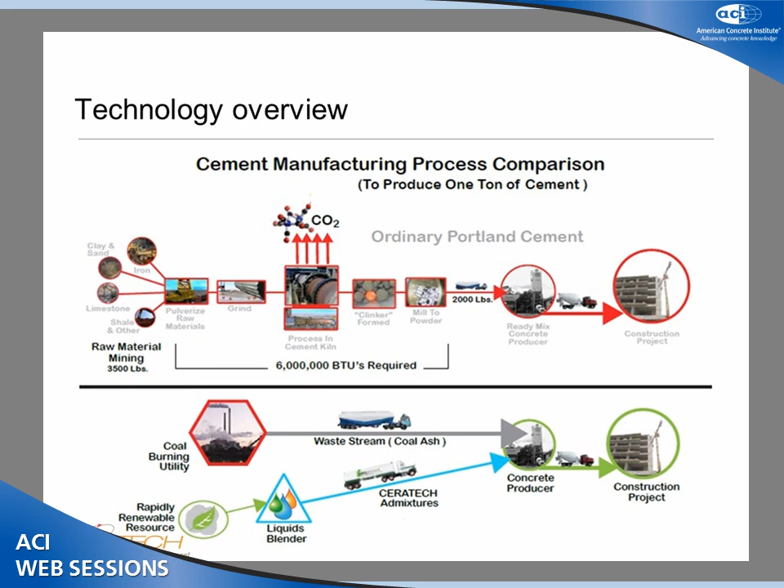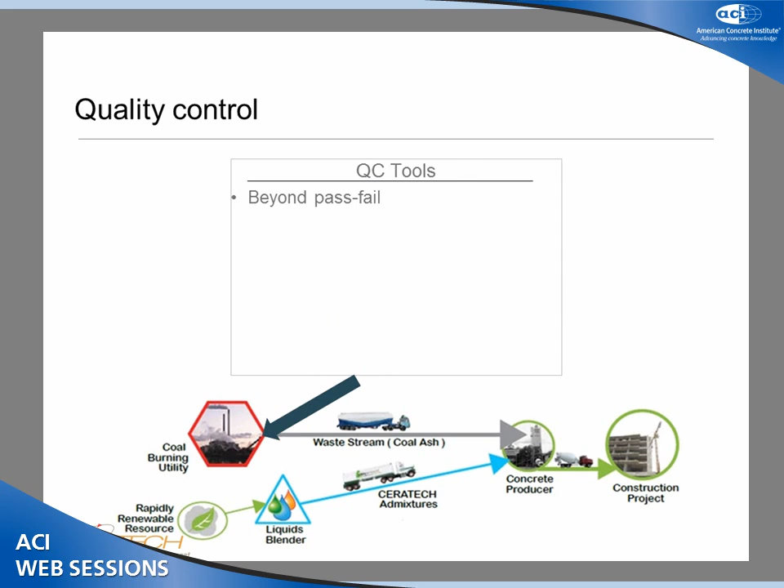So we were looking for quality control tools that we could actually set up at the power plant or before basically the ready-mix plant. So we need something, again, beyond pass or fail. We know that Class C works and Class F will not work for us. We want to be able to deliver concrete with consistent set time and strength.

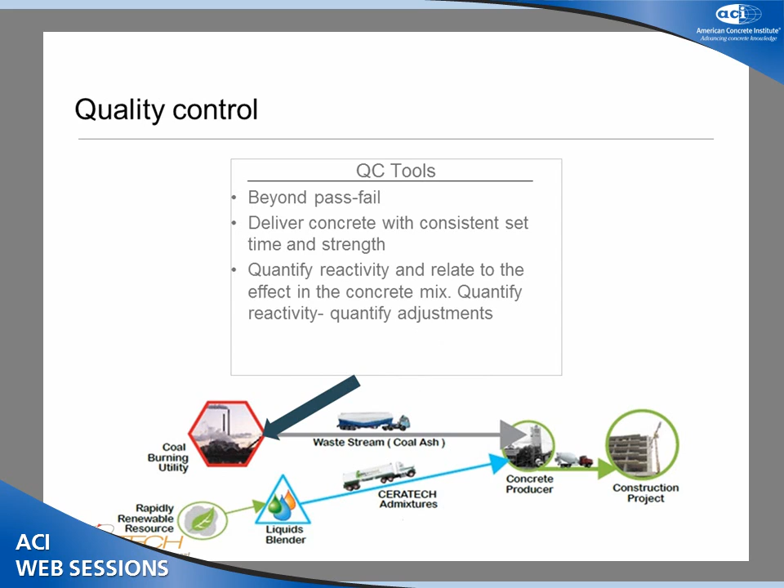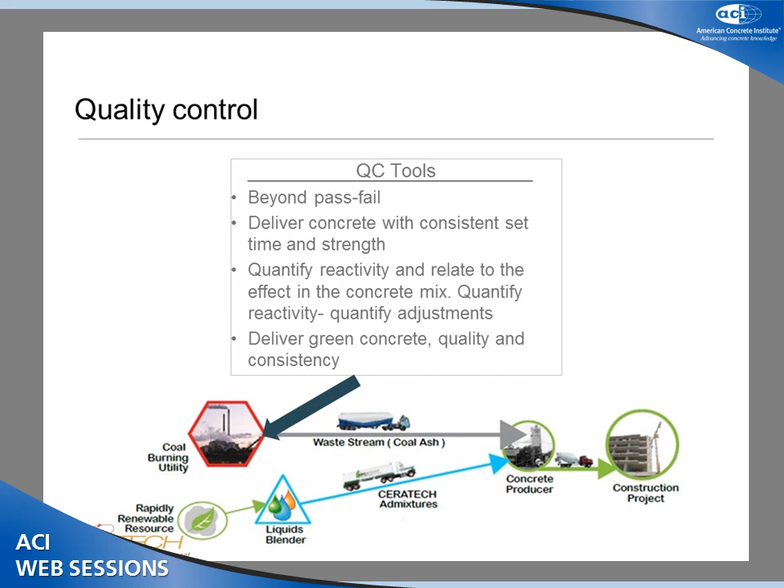And by quantifying the reactivity, we can quantify changes also in the mix. So if we know how much the reactivity changed, we can quantify the amount of change that we have to make in our activators. So we could be able to deliver not only a unique product, but we can deliver quality and we can deliver consistency.

So I think we all know what fly ash is, but I'll say it anyways. Main components are silica, calcium oxide, alumina, iron oxide. Class C fly ash also has pretty high contents of magnesium oxide. Mostly amorphous, higher amorphous content than Class F fly ash. Crystalline components, most people would agree that they can be considered relatively inert. Mean particle size on average, we have around 20 microns. And most people also would agree that the reactivity depends on the glassy phase content and the glassy phase composition.

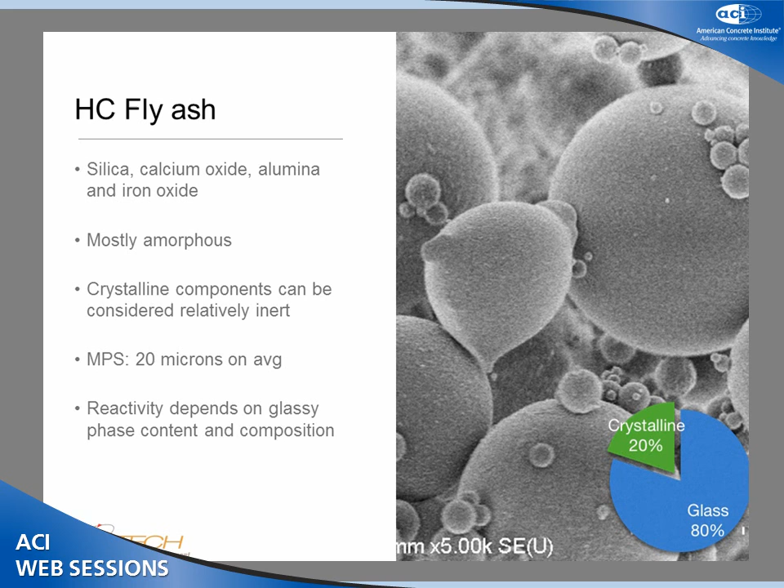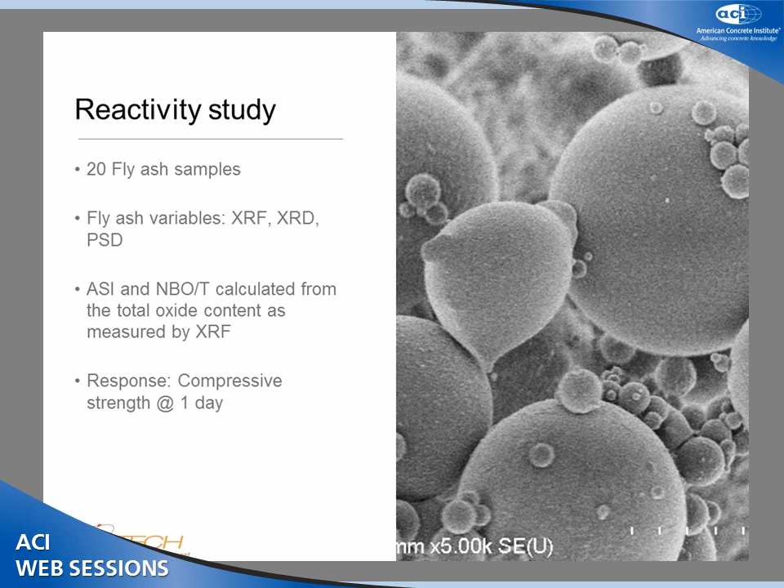So what we did, we took 20 fly ash samples that we were using commonly, from low strength to higher strength. We ran chemical composition, crystallographic characteristics by XRD, qualitative and quantitative. We also obtained the particle size distribution of the fly ashes. And we used a couple of glass manufacturing parameters, which are the alumina saturation index and the non-bridging oxygens per tetrahedron. They are calculated directly from the oxide content as measured by XRF. And the response that we used was compressive strength at 1 day.

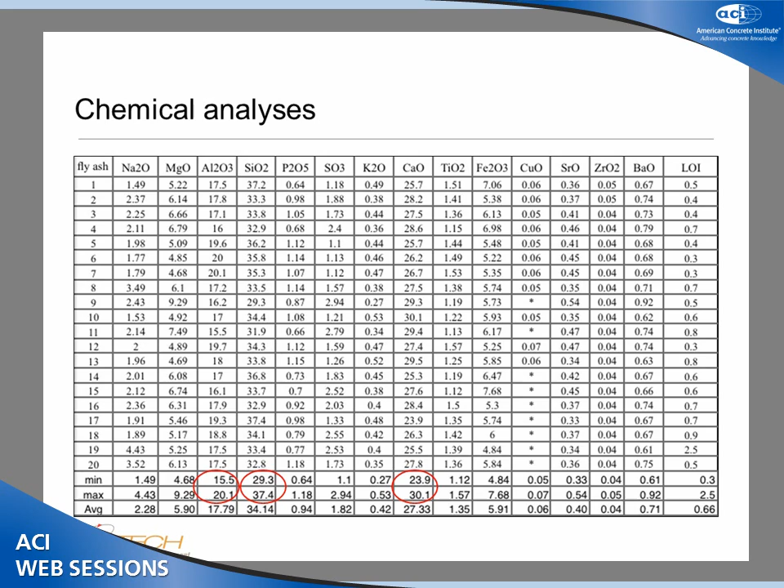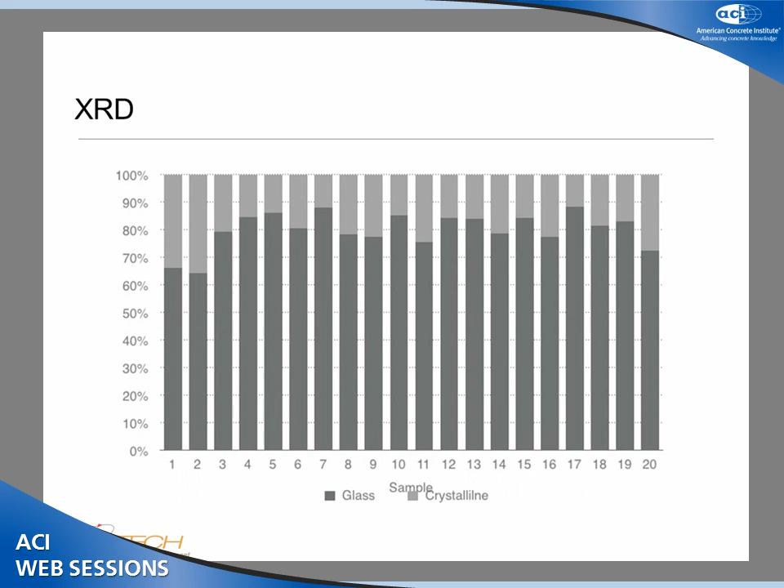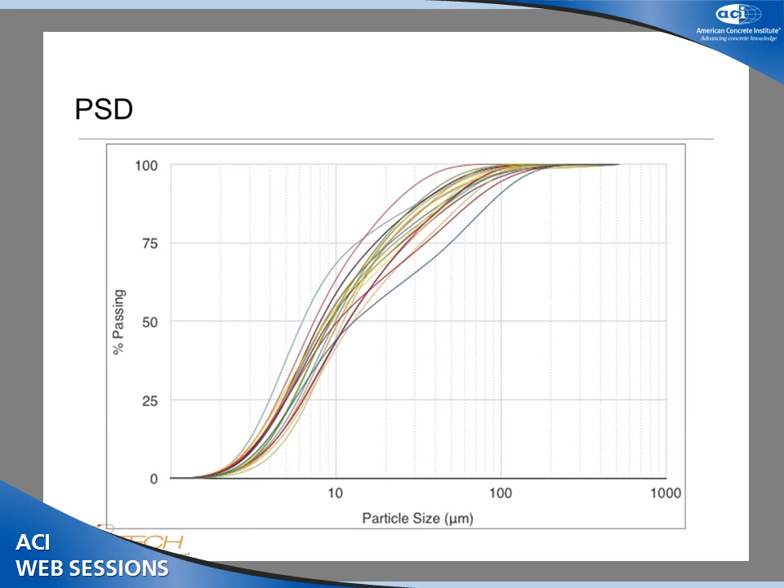That's the crystallographic characteristics. As you can see, the amorphous content ranged from around 65% to almost 90%. I don't have here the crystalline phases because, as I said, they can be considered relatively inert. That's the particle size distribution, just to show you that they were pretty close together. There weren't any big differences in the physical characteristics of the fly ashes. But here, as you can see, the differences in compressive strengths were huge, from 2,000 to 6,000 psi. So that's a big difference for such a short range in variability in the chemical composition.

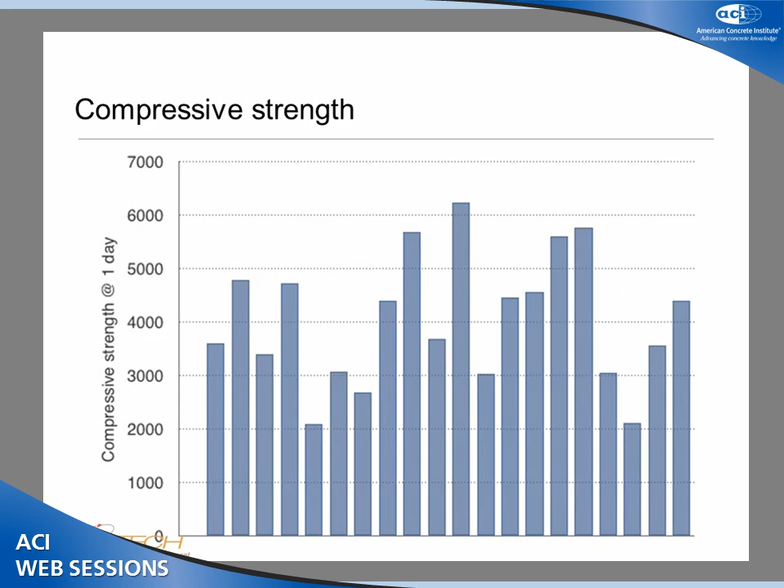So what we did was to run a stepwise regression. Basically, we took all the possible regressors. So basically the oxides from the chemical analysis, LOI, non-bridging oxygens per tetrahedron, the amount of glass. We also considered the calcium to alumina ratio, the mean particle size, the alumina saturation index, and the sum of silicon plus iron plus aluminum.

So just a little bit of basics. These parameters are widely used in glass manufacturing, right? And basically, in glass manufacturing, you have two different kinds of components. You have network formers and you have network modifiers. The network formers have a valency of +4, so they can form tetrahedrons. They can be linked with 4 oxygens, and each oxygen is acting as a bridge between the two network formers. So you have a network kind of like this one, right?

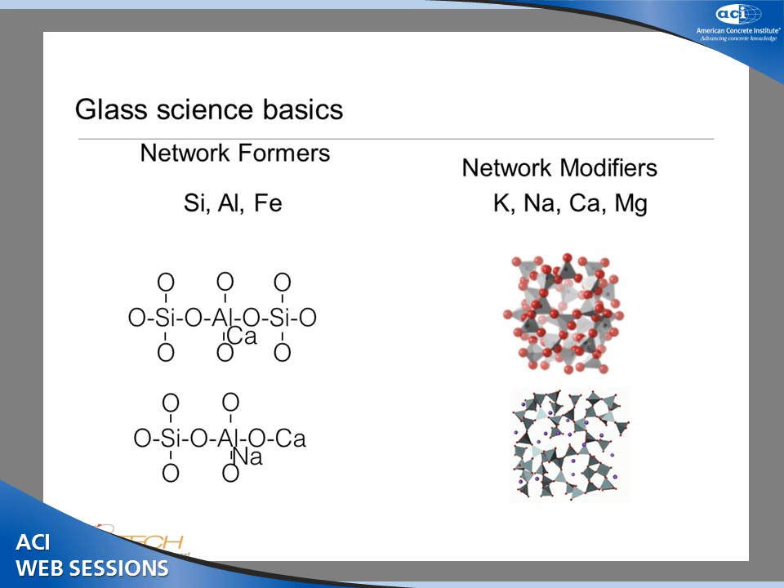As long as there's aluminum there and there's network modifiers, the aluminum is going to take these network modifiers and they're going to be acting as charge balancers for the alumina so that it can be combined with 4 oxygens until all the aluminum is saturated. So once all the aluminum is saturated, then the network modifiers can actually be acting as network modifiers. And then the more network modifiers you add, your network starts to look more like this one. It's a more fragile network.

So pretty basic formula. We calculated that from the XRF analysis once again. These were the results that we obtained. I should also mention that once we saw that we were getting good results with this, we added 18 more fly ash samples. So at the end we had 38 fly ash samples. So when we plot this with the compressive strength, this is what we get.

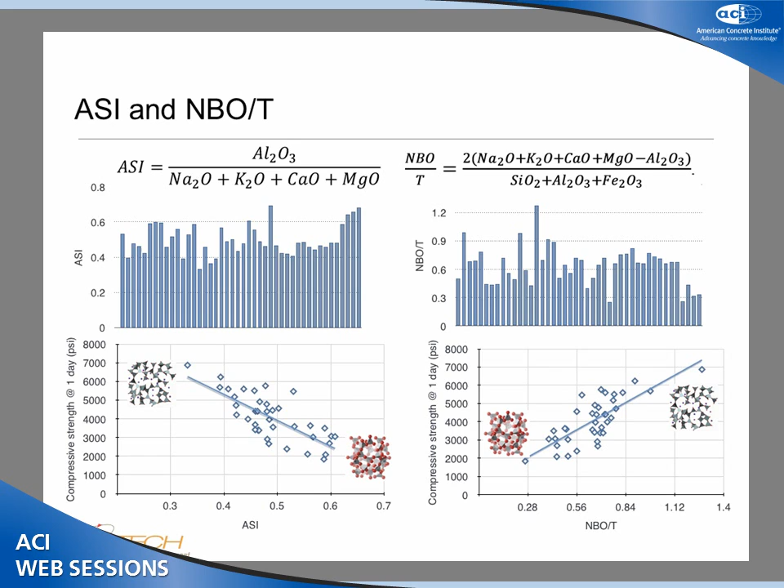So for example, here an alumina saturation index of 1 would be that all the aluminum is fully balanced and your network is looking more like this, right? There's more polymerization in the network and it's a more stable network. So once your network modifiers start to go up, or the amount of calcium usually is what starts to go up, then you have a network that looks more like this one, more fragile glass, a more disrupted glass that is more reactive. And we can see that the compressive strength is actually going up as your alumina saturation index numbers drop. And the same here for the non-bridging oxygens per tetrahedron.

So as with any model, we have a number of assumptions and restrictions. Basically, the first one is that we assume that we have no crystalline phases. Obviously, that's not true. There are crystalline phases that are inert there. We also didn't consider the free energy of hydration. We considered that the physical characteristics are constants. We didn't take that into account. Obviously, there's variability there. We also consider that the material is homogeneous, and it's really not. The chemical composition will vary from particle to particle, basically, and what we see on the chemical analysis of the fly ash is basically just an average of all the chemical compositions of all the particles.

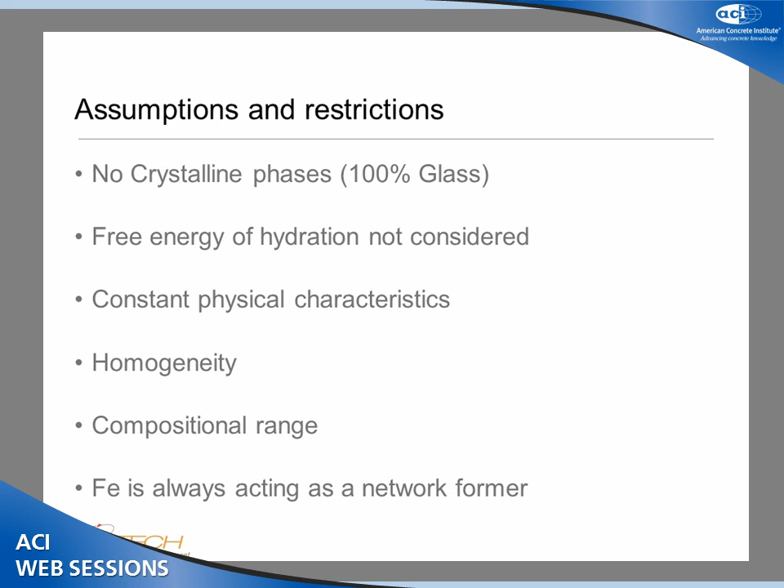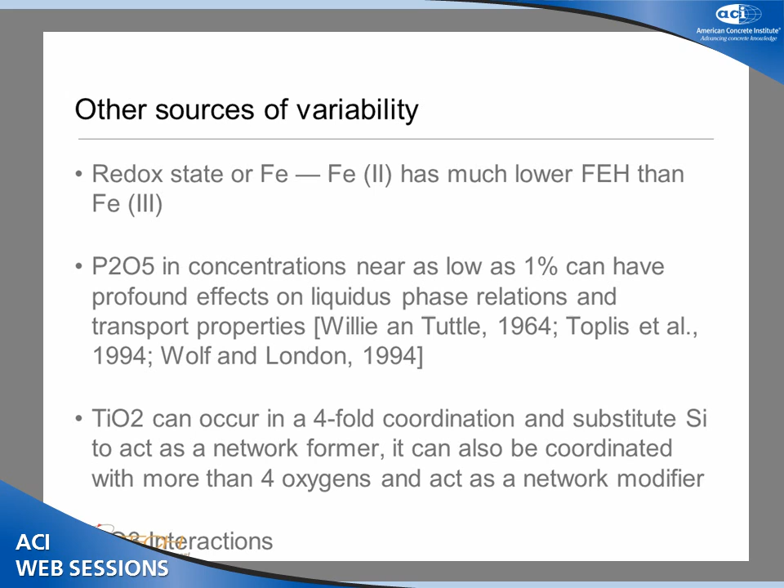We also assume that iron is always acting as a network former, and that's not always the case, depending on the burning conditions. It can be iron 2 or iron 3, so that would change things a little bit. Also, we didn't consider the phosphate concentration. That also can have a big influence on the glass network. Titanium could substitute silicon in a fourfold coordination. We didn't consider that either. And here on the bottom, you can almost see it, SO3 interactions. We didn't really consider SO3 interactions. That's also something that could have an influence there. However, despite all the assumptions, it seems to work very well.

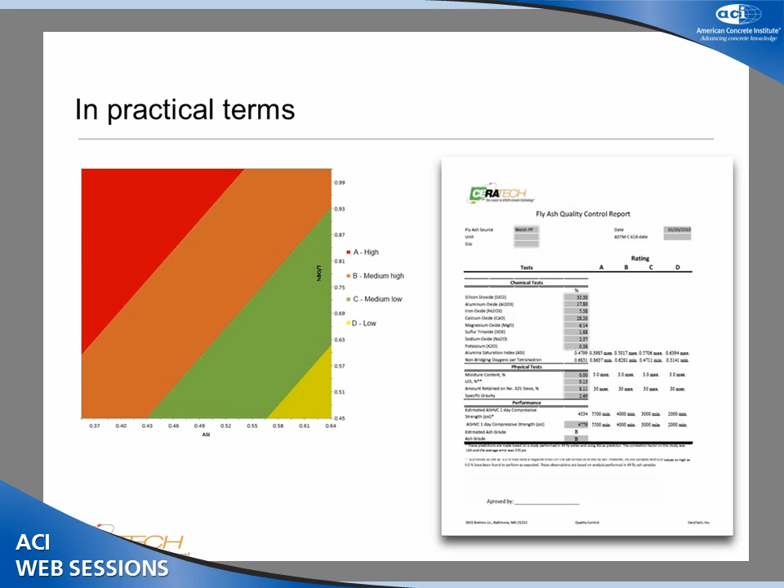So we also came up with this quality control report. You input basically your chemical analysis, and it'll give you a projected compressive strength and a projected grade that we can then match with our in-house performance-based test. Raj, you will see a presentation from him this afternoon. He developed our standardized in-house test. So we can match now the chemical analysis or the potential reactivity from the chemistry of the ash to our performance-based test. That's it. That's all I have.